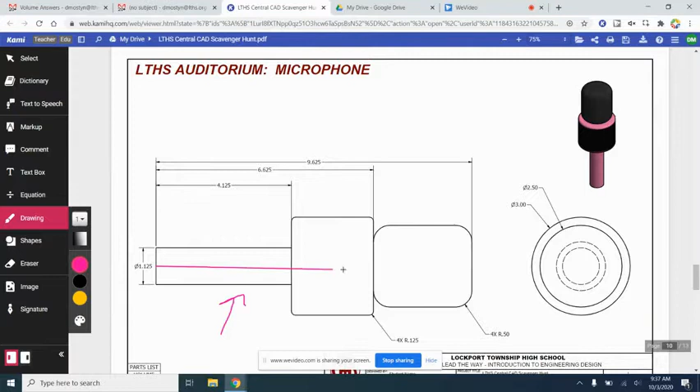All right, so we're going to draw the microphone here. This is a pretty simple part because we're going to draw half the profile. Here's the profile right here. We're going to draw half of it and we're going to revolve it. So I'm going to put a pink line here to show the half that we want to draw. We'll draw this top half up here, all this part here, and then we'll revolve it 360 degrees, kind of like this, to make our microphone.

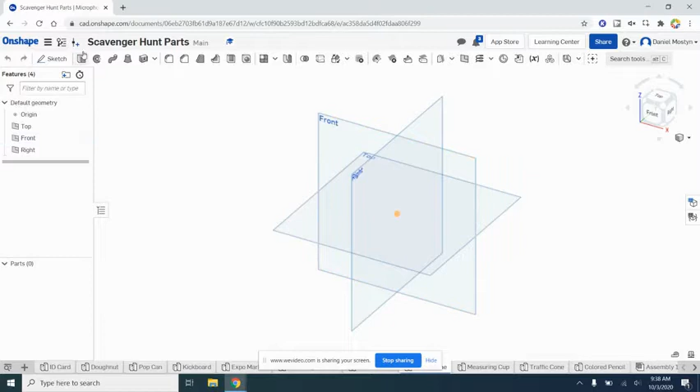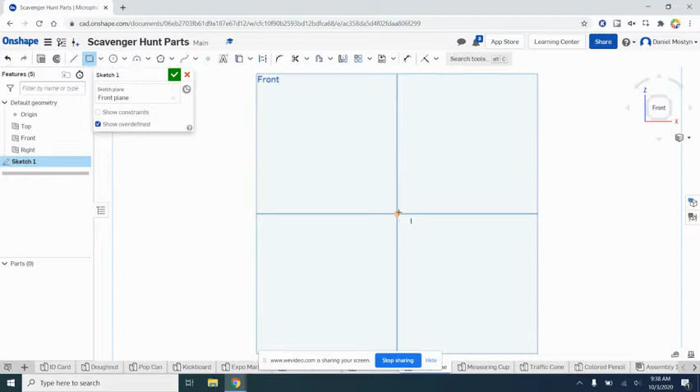Okay, so first thing we want to do is start a part studio. We'll sketch on the front plane. Then we're going to look to see how we're going to start this. Looks like the microphone holder is kind of a rectangular cross-section, 4.125 long and half of the diameter. So we'll go ahead and just start a rectangle.

We want it to be 4.125 long. Then how wide do we want it? We want it half of 1 1/8, 1.125. So we'll say 1.125 over 2. All right, so that's the right length of our half microphone holder.

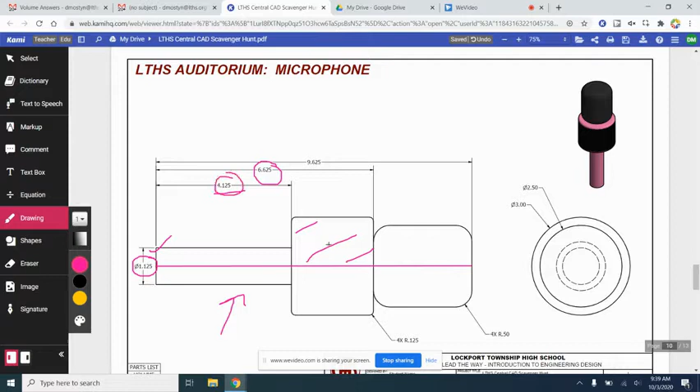The next thing we're going to do is make another rectangle that's this size right here. We're going to have to let Onshape do a little math for us: 6.625 minus 4.125. And how tall will it need to be? Well, this dimension right here is the thickest dimension, so that would be this diameter right here. All right, so let's let Onshape help us out here.

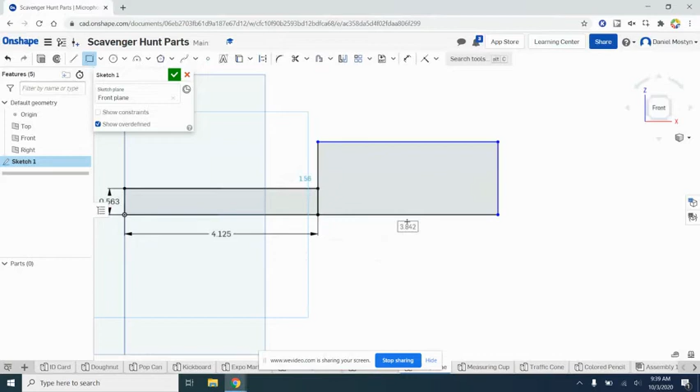Let's do another rectangle. We'll start it right here. It's going to be a little bit bigger. How long is it going to be? 6.625 minus 4.125. We'll check our math. That's how long it's going to be, 2.5. How wide is it going to be? Half of this diameter, because that's the thickest circle on our cross section. So half of 3 is 1.5. So we'll do 1.5. There we go.

All right, so we have a little fillet here. It looks like we have 4 fillets at 0.125. Actually it's only going to be this corner and this corner, so we only have to do it twice. When we revolve it, the other ones will be created for us. So we need to do 2 fillets to round off these edges.

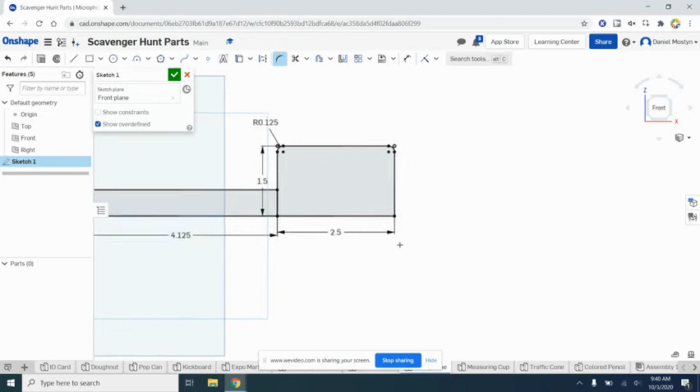One here, and we want this to be 0.125. It's a little bit less than what we have here, 0.125. And we'll do the same thing for the other one. There we go, 0.125, and that looks good. Okay, we're almost there. We have one more rectangle to draw, and it's this one right in here. Clean this up a little bit.

We're going to have to let Onshape do some math again to get the length, and then the height will be from here to here. We'll get that from this inner diameter of this circle. So let's go back over here and select the rectangle tool one more time. This is kind of like the part of the mic that you speak into. It's going to be 9.625 minus 6.625. We'll just let Onshape do the math. 9.625 minus 6.625 should be 3.

There we go. And then the height of it is going to be half of our inner diameter, which is 2.5. So we'll say 2.5 over 2. That's kind of like a radius. We have a couple of fillets that we need to put in. 2 fillets right here and 1 right here, at a radius of 0.5 inches. So we'll throw those in there.

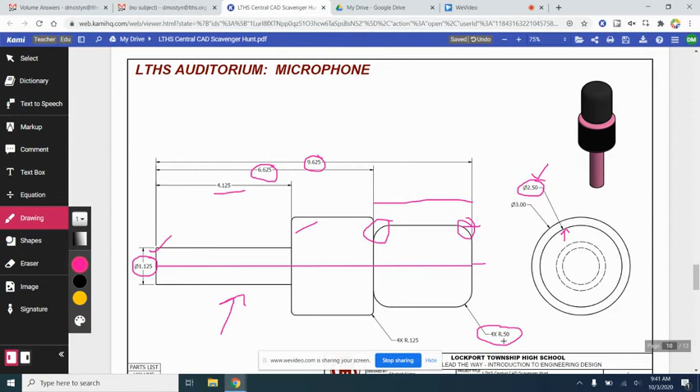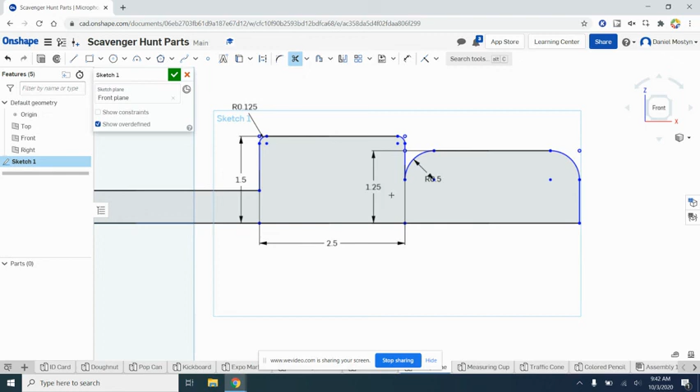Here to here, we need it to be a little bit bigger fillet, 1/2 inch. And here to here, we'll also have that 1/2 inch. We'll hit enter. All we have left is to clean this up a little bit before we revolve it, using the trim tool here. This line right here, I think, is a dimension line, so we don't have to worry about that. And then this one. Have to do it twice because we made 2 rectangles. Once again, this thin line here is a dimension from 2.5. I think our sketch is finished.

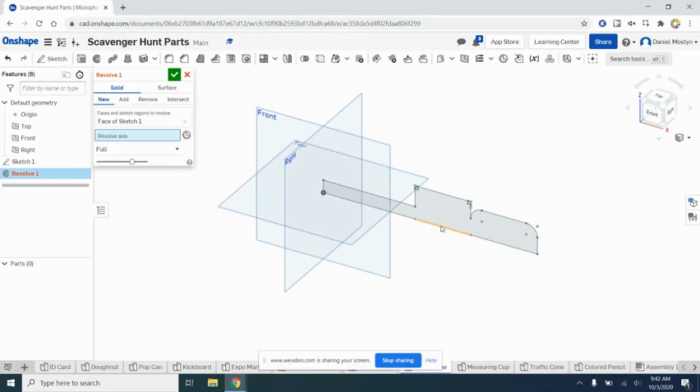All we have left to do is to finish our sketch and revolve. So we'll come over to the revolve tool. We'll grab the mic sketch, or half a mic actually. We'll click the axis, and we want to revolve it around either of these lines, both are fine. And there is our microphone.